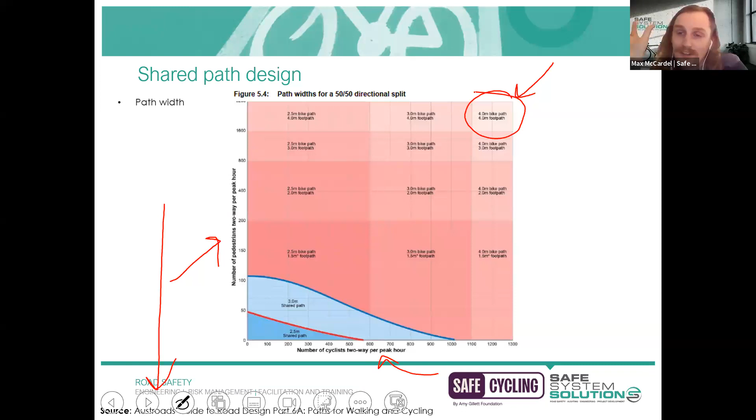So if I look right at the top corner, where I've got lots and lots of pedestrians and lots of cyclists, it's actually recommending we install a 4-meter wide bike path and a 4-meter wide footpath. It's not suggesting we just have one super wide shared path area. Instead, it's saying let's put riders in this space, make it 4 meters wide, and pedestrians over here, 4 meters wide, separating those two users. So an important clarification there - we don't always have to be trying to share our paths.

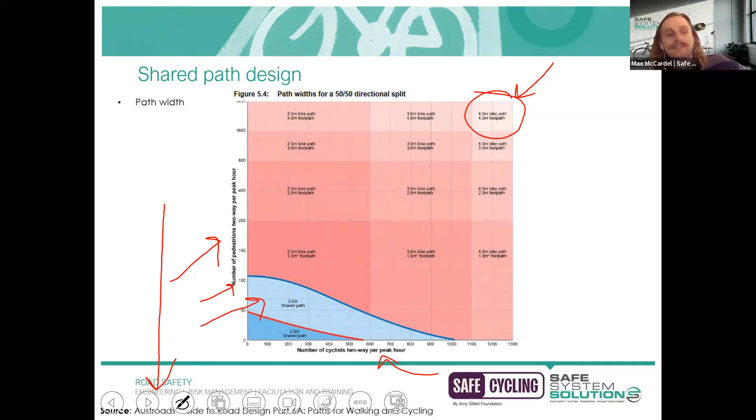You can see this blue area is where a 3-meter shared path is being recommended. As the pedestrian numbers get higher, above 100, that's when we're already looking at getting separation between the two. So this is very helpful if you're currently working out what your future network could look like. If you're into strategic planning, this is a wonderful figure to help guide that next stage of development.

Another very common reference, out of the same document, suggests typical widths for shared paths. The way they've categorized these paths is into 3 terms: a local access path, a regional path, or a recreational path. Unfortunately, there's very limited definitions to clearly demarcate what the difference between each of these is.

So I'll give you the practitioner's translation of this. There is information within the Austroads that supports this, but it's relatively vague. The local access path is what's shown in this left photo. You can think of it as a local street - it's not meant to have high volumes of pedestrian or cyclist traffic. Instead, it just provides very small, probably residential access to that specific part of the network, so you wouldn't expect a throughput of traffic there.

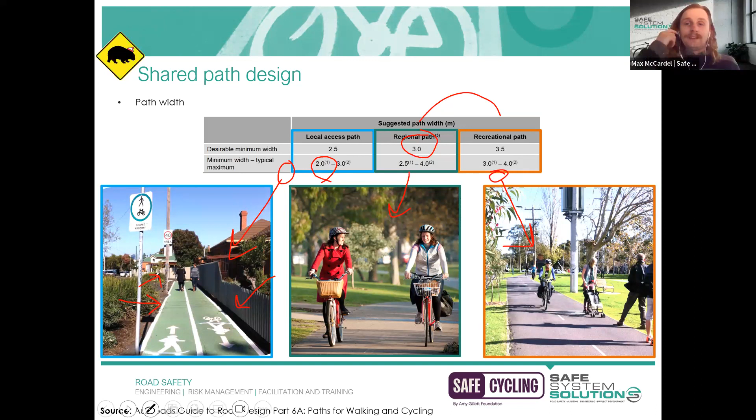Alright, so we'll get stuck into our gradients now. Generally, when we are thinking of gradients for shared path design, we're pretty concerned about the uphill gradient, because we know that generally most riders don't like cycling up hills.

I'm one of those riders. I actively check my route prior to getting on the bike to make sure that there's nothing too hilly because I'm just not built for that. And so I will actually go out of my way to ride a flatter route.

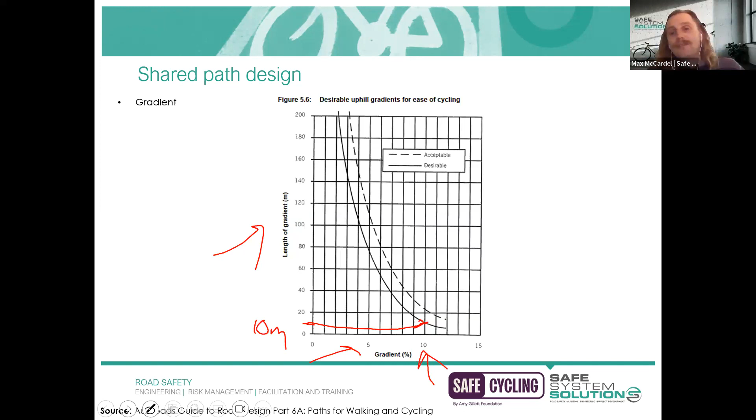So yeah, that's just what this graph is trying to tell you. But I think it's also important to reflect on the other aspect, whereby generally shared paths are bi-directional, so you can travel both ways. So if you've got a cyclist that's traveling uphill at 10%, then they will also be expected to travel downhill at that 10% as well.

And that leads in nicely to this next little figure that we've shown here. So we can see here, this is kind of like an overpass structure for the shared use path - they cross over this busy arterial road and don't have to deal with all that traffic over there, which is great. But they do have these ramps that bring them back down to that shared path level again.

I'll open up to the chat and pose a question - you just need to chuck your answer in the chat. What I'm interested in is, is there anything about this particular site that could be concerning if you were a rider traveling down this path here? I'll give you 30 seconds - just have a little look at this photo and think about if you were riding down this path, what could be an issue with this example?

All right, I can see lots of answers coming through, which is fantastic. Faster than I can read them, in fact.

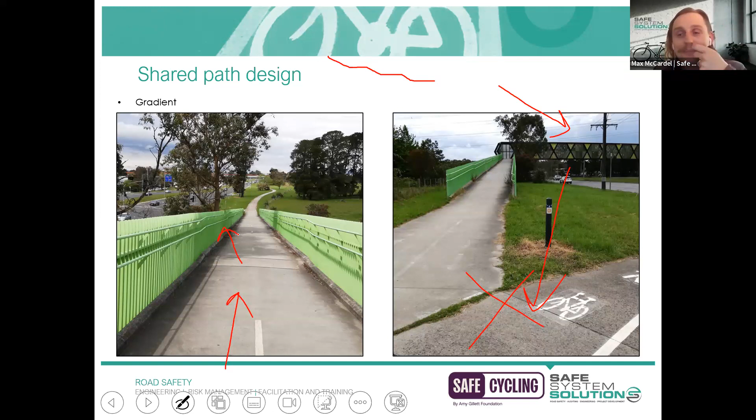Really good feedback and analysis from lots of people there. Marissa, I'll leave it to you to pick a couple of winners, but lots of good insights there.

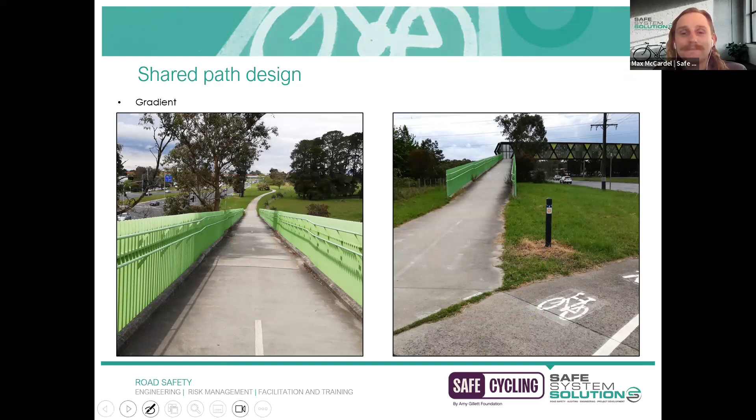For those who have done any geometric design, you'd be familiar with the idea of an operating width or envelope. We have envelopes for passenger vehicles and heavy vehicles that articulate the dimension requirements and clearances for that specific user. Our bicycle riders have a similar operating width, and the way that's defined is we take a nice, easy 1 meter. Of course there are lots of different bicycle arrangements, some taller, some shorter, some with much wider handlebars, so this is generally taken as the average. As time goes on and the fleet changes, I'm sure we'll see changes to these dimensions too, but this is generally what we work with: a 1 meter operating width.

The head clearance as a minimum that we like to provide is 200 millimeters above where the rider is seated. Where that becomes most relevant is if you've got shared paths that cross underneath roads, or use existing culverts to get through specific areas and things like that. That's when that head clearance would be most useful.

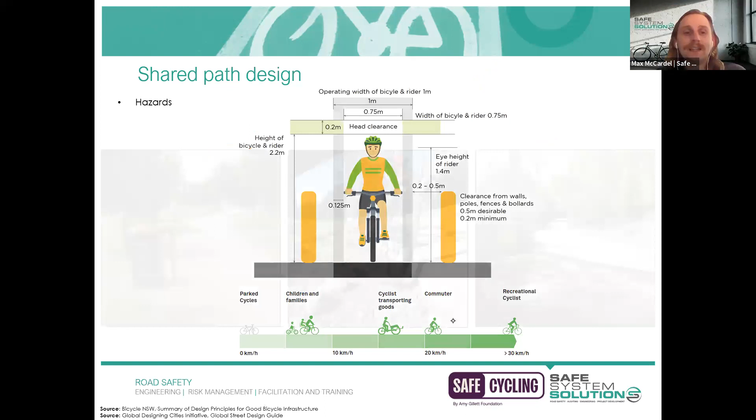I touched on briefly hazards and what kind of distance from the operating width would be considered a hazard. More commonly, the approach is: look at the edge of a shared path and measure half a meter back - that's 0.5. Anything that is fixed within that space will generally be considered a hazard. That's the more practical way of interpreting the figures I showed previously. So take the edge of your shared path, and if you're doing any CAD work, just do a half meter offset line and pick up any features within that space. If they're fixed, they could be considered a hazard for the cycling community.

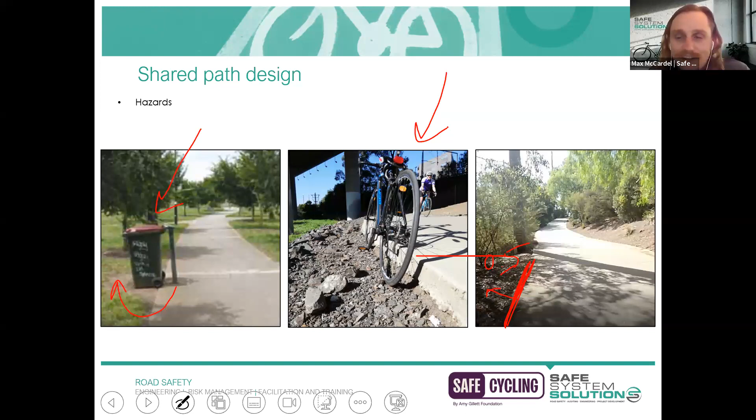Another really common one shown in the middle here is the lack of batter - you can see the full depth of that concrete is clearly exposed. I'm guessing when the contractor went out there, that's where their form was, and they took off their form and didn't backfill anything. That 120 mil drop off is significant enough that if you were to become an errant rider within that space, it's very unlikely you'd be able to make your way back onto the path. Instead, you're probably going to fall off and potentially end up in the drink over there. So this is just a simple one where you ensure your contractors are aware they need to backfill up to the top surface level of your path.

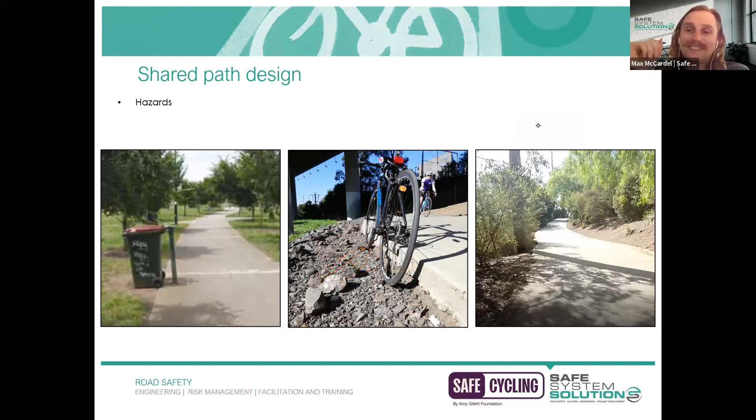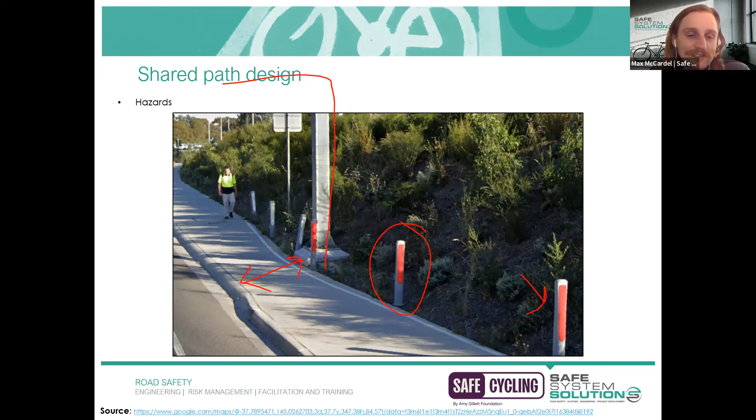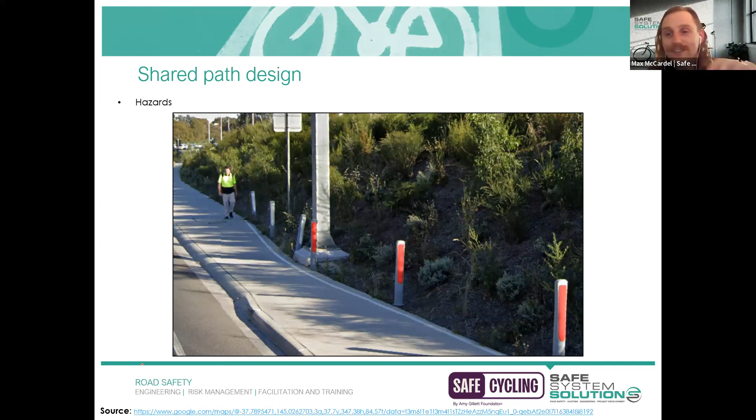Of course, if you're reviewing things like this at the design stage, or designing these things yourself, you wouldn't go straight to this. You would instead say, okay, I know I'm not getting my half-meter offset there - let's instead shift this across, use the embankment, maybe build some retaining wall just to make sure it's structurally sound. Then you've got a nice, consistent width for your shared path all the way through there.

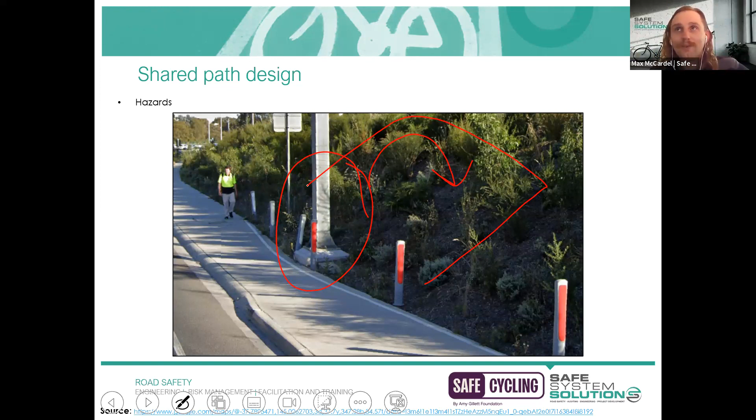It follows a very similar calculation, so nothing too daunting, just different coefficients being used. Things you'll need to make assumptions of are the speed of the cycling community, the friction coefficient you're going to use (generally worst case scenario, which is wet conditions), as well as the grade of the path.

Your sightline requirements are important for both your horizontal geometry, so looking around curves, and also vertical geometry, so looking over a crest and things like that.

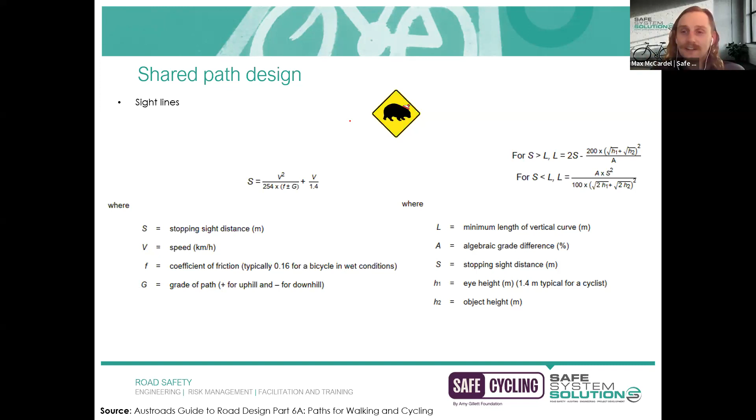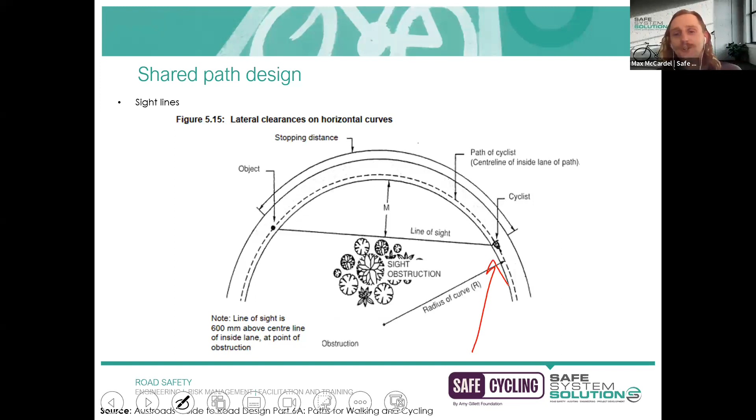Just to paint a picture here, this is an example of horizontal geometry, whereby we've got this cyclist turning around the bend, and if there were to be some form of hazard on that path, it's important that they have adequate time to stop so they don't collide with that hazard. Same principles and philosophy as road design sightline checks, just applied to our shared path network.

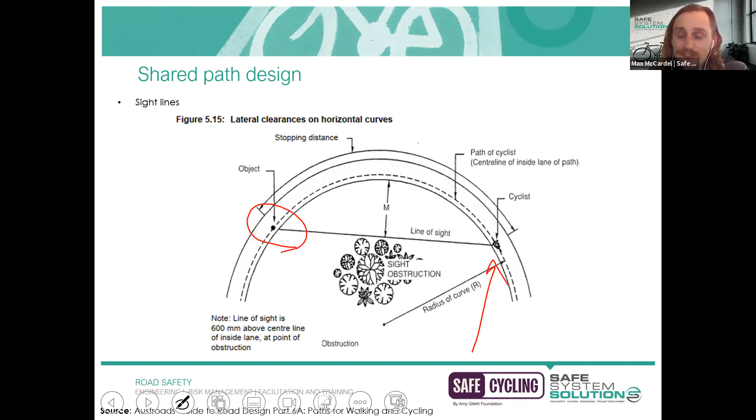Now, in practice, this is generally what you could be doing. This photo is actually of a shared path - it may not look like it, but this is completely unsealed. If you were riding along here, you can appreciate that because of the overgrown vegetation, you can't really see what's happening beyond that bend.

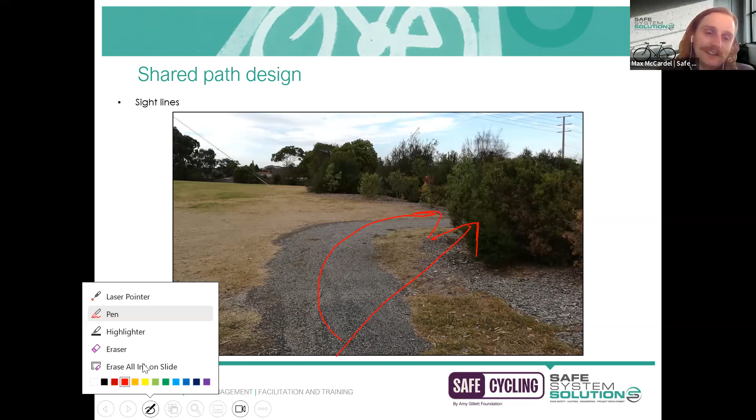If there were a fallen over log, or a cyclist on the ground there, and you're just traveling along, you may have no idea that's there. That's where those sightline requirements come into play. All you'd need to be doing, if you're in that design space, is checking what type of landscaping is going in, how big it gets, and even considering vegetation trimming just to help open up the sight lines.

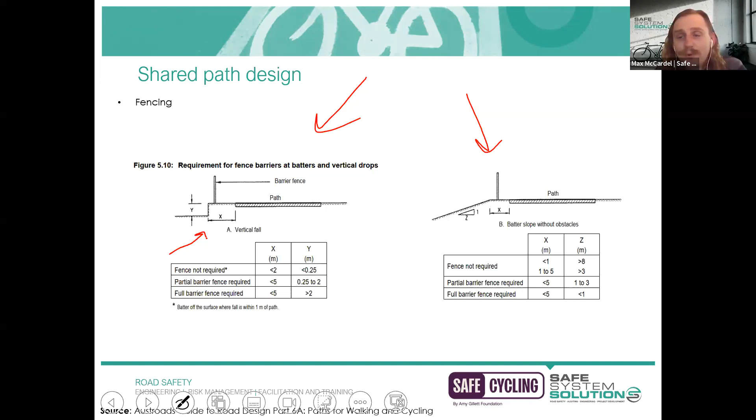For those not too familiar with these tables, don't be too stressed—I'll chat you through it, but you can leave the technical details for those comfortable with it. Basically, we've got X, which is our distance from the edge of the path to wherever the hinge point or vertical drop is, and Y, which is the height of that drop.

Our first category: a fence is not required where X is less than 2 and Y is less than 250 mil. The reason a fence isn't required is because we should actually be battering off the surface—filling in this gap and flattening it out. Don't worry about a fence, just use natural fill. That's what that first category is saying.

The next two categories are referred to as a partial barrier fence or a full barrier fence, and I've got photos to show the difference between the two. Basically, if it's less than 5 meters away and Y is between 250 mil and 2 meters—a 2 meter drop is huge—then you'd put in a partial barrier fence, but if it's greater than that 2 meters, you'd put in a full barrier fence.

Similar approach with the gradients or the batter adjacent to the shared path. You've got this calculation, 1 to Z—for those who've done cross-section longitudinal analysis, that's common terminology, or rise over run for those who remember year 8 mathematics. That's the slope of the grade: 1 over Z, and the bigger Z is, the flatter it is. So if it's super flat, we don't need a fence at all, but the steeper it gets, we'll go for either a partial or a full fence—I'll show you those differences now.

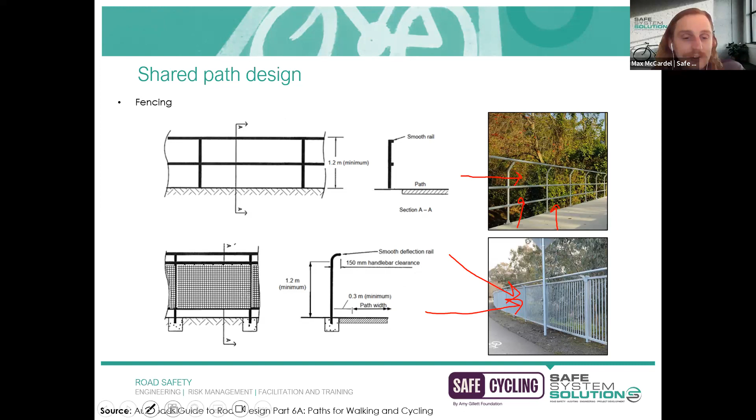In my personal opinion, it's overly complicated. I don't know why they went with these separate categories here. I've seen much more of these full barrier fences being installed, perhaps where there isn't the need for it, but it might just be easier to do, or maybe manufacturers find it easier to install. I'm not really sure. Anywho, that's just my 2 cents on the fencing types.

But what is common in both of them is they have this smooth rail or smooth deflection rail. You can see the way that has been designed, it actually juts out, sits proud, and extends into the shared path itself. The way it's designed is if you've got a rider on their bicycle, the height of that smooth deflection rail is between their elbow and shoulder. So if a rider was to become errant or start to drift off, the first thing they collide with is this smooth rail, not any of the vertical members that could snag or any of those little brackets that come out - none of that would be hitting the cyclist. The first thing that strikes is that upper arm area.

So that's also referred to as cycle-friendly fencing. It's just this idea that you have a single rail that juts out and protrudes so that errant cyclists are basically colliding with a smooth rail as opposed to any protruding bits of metal.

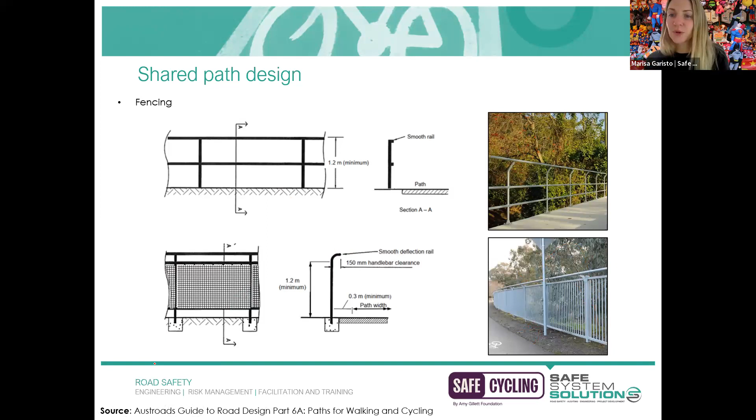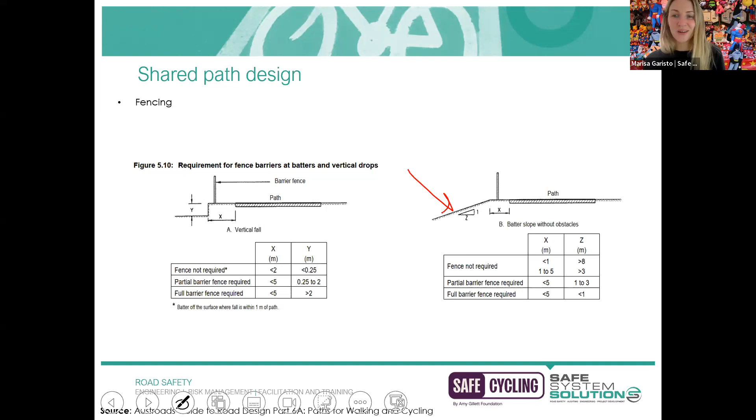So a couple of questions. Does the height of the batter, or what is at the bottom, come into play when deciding on a fence or not? For example - we've just got an example, can 0.5 meters offset to a 1 to 3 batter 2 meters high onto a flat grass area. Okay, so I'm guessing the way I'm reviewing that is like you might have a batter there and then another drop off. So you could still use this calculation because this is saying anything that's less than 5 meters would be considered a hazard, depending on how big that drop off is. So you may just be combining both of these to determine if a fence is required.

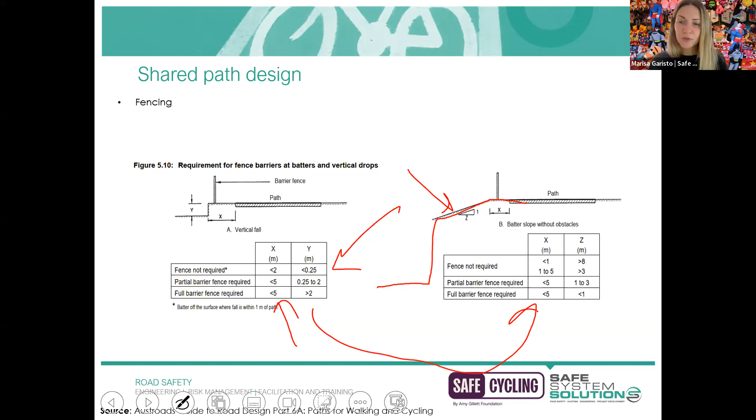Okay, and does the horizontal deflection rail pose a spearing risk to vehicles? Great question, let's give a prize out there. Yes, I would say - theoretically they're generally just one long welded piece of steel, so it's not as if... well, I guess there are joints, so theoretically it could come off at that joint and act as a spearing risk. So you generally wouldn't be installing these adjacent the carriageway where they are operating in that longitudinal fashion, because you could have an errant vehicle drive into that and then the horizontal deflection rail just going straight through the windscreen. So very, very good pickup.

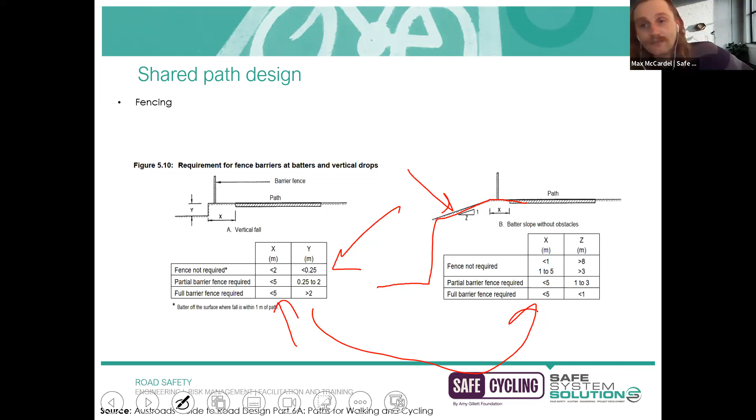Great, thanks, Max. No other questions, but poor Matt had his daughter fall through a partial barrier fence into the creek. Oh, I think she was okay. Oh goodness. There you go. That's good, yeah.

We've just had - can you run a couple more questions? We've just got them coming in on the chat. What would be an alternative fence type to implement?

So if you were working along the carriageway, generally what you would do is you would install an approved barrier system. That edge barrier system would shield errant motorists from the shared path traffic.

There's a few options you can do. You could have on the posts itself, which would be installed within the shared path, little protector caps. So if a cyclist were to clip them and fall onto those posts, they're not just falling onto metal, an I-beam, something like that. They've got a little bit of padding to them, still going to hurt.

But you could also do a back-to-back W-beam profile, whereby on the carriageway side you'd have the barrier system with the W-beam, but also on the shared path you'd similarly have the W-beam, not because you're expecting cyclists to crash through there with such force, but purely to protect them from those posts that can create snagging risks. So generally, adjacent carriageways, you don't see these smooth deflection rails, you see those barrier systems implemented instead.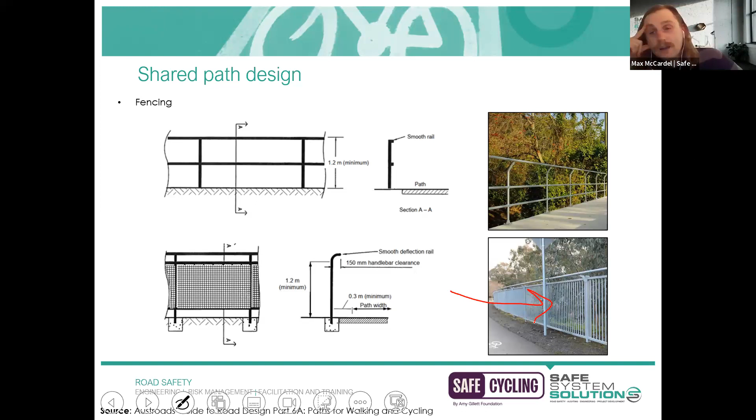All right, shared path crossing roads. Now I've got a little poll here, I believe. And I'll let Marisa launch the poll.

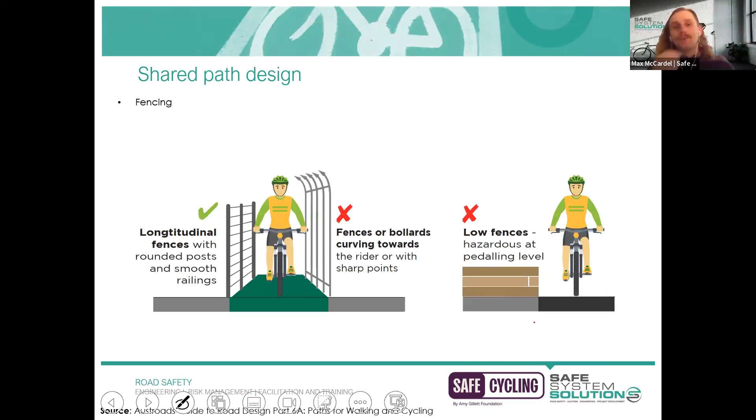It's very conveniently about fencing. We've had a good discussion around fencing today. So the question I've got is, hopefully you've seen this launch on your screen: should fencing be installed along this shared path, the one that I'm showing here? Just to give you a little demonstration, what I'm talking about is, would you put fence here?

That's a pretty good drawing. I'll give you 20 seconds to have a go at that. 18 seconds. Love the wayfinding, yeah, pretty jazzy, isn't it?

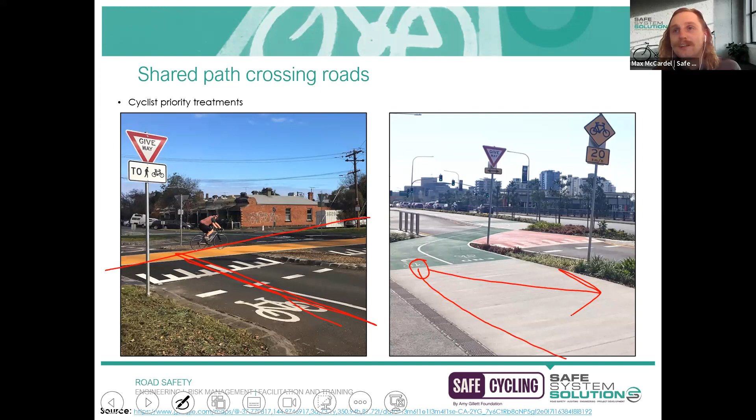I'm really not trying to throw any diss to Brisbane - this is a wonderful path here, the Brisbane Bicentennial Bikeway, and I do appreciate that this project has pretty significant constraints. I just wanted to show that as an example of why we would be looking at trying to make things as perpendicular as possible.

And just to show you what this site actually looks like out on the ground, you can see there's actually quite a lot of these bicycle tread marks, perhaps indicating that riders are kind of slamming on the brakes at the last minute because they are seeing that this vehicle is not yielding to them and they are forced to undertake emergency braking. So yeah, just kind of illustrate that as an example.

All right, bollards. Now we do see these incredibly commonly across our shared path network, basically installed wherever there is a carriageway. And whilst historically that has been the approach - wherever the shared path interacts with the carriageway, install the bollard - I think we need to move away from that philosophy a little bit, because we need to acknowledge that these things are hazards. We talked about before that anything half a meter away from the edge of the shared path is considered a hazard. Well, these things are placed right in the middle of shared paths, so they are definitely considered a fixed hazard for cyclists.

Now, really common ones are just using these types of vertical bollard shapes. You may have reflector tapes or things like that on it. The reason that you may have this middle one included as well, because surely the two on the outside would be enough to stop vehicle entry, is to stop kind of monkey bikes or any of those dirt bikes entering. To me, that is perhaps one better achieved with enforcement, because this is a 24/7 hazard for all shared path users or cyclists within that area, whereas the risk of monkey bike users could be once a month at specific times, and you've got to weigh up what's a more significant risk.

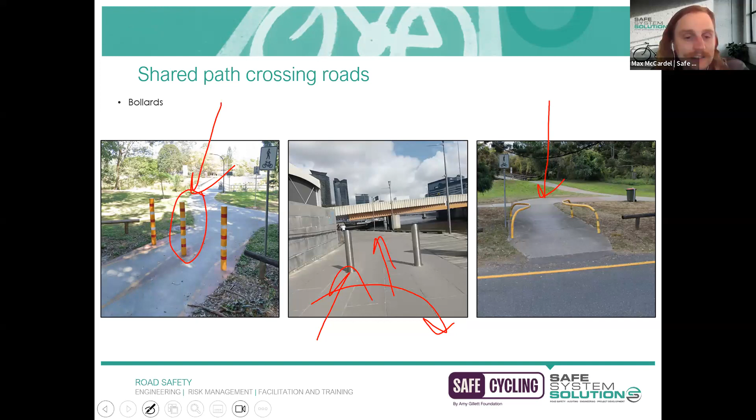More bollards, I've got lots of bollards - sorry guys, stay with me. Timber bollards, this one is like a chicane treatment. Generally I think they can work quite well. They certainly slow down cyclists as they're approaching a conflict point. However, what I have seen is them become very narrow.

If you were a cyclist riding, say, a cargo bike, or you had a bike with a trailer, you might run into trouble getting through there and navigating this. This one isn't too bad, it's relatively wide, but there are really, really narrow ones where it's physically impossible to take specific bicycles through those features because the swept path just does not allow for that. So they've got their pros and cons as well.

This one is just an example of a U-shaped bollard, heading into Hobart there. I always use the analogy of imagine if we had a traffic lane approaching a rail line and we just put a bollard in the middle of the traffic lane and said, you've got to slow down here, just be really careful because there's a big hazard coming up ahead. There's no way that's how we would treat that.

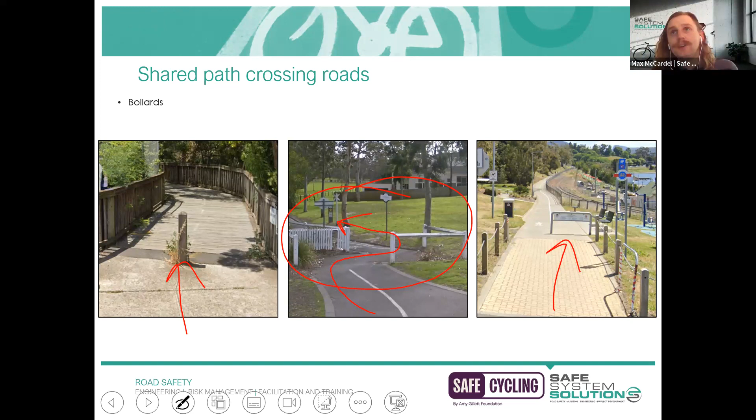So we've got this idea that we have to put bollards everywhere. I think we need to take a deep breath and think about our risk profile. What's more common to occur - is a vehicle going to enter this space, or is it more common that frequent injuries will occur for our cycling community? Now, to give you an appreciation, I've included this as an example.

This is Andrew here, and a few years ago he ran into this bollard. This is just right down from our office on the Upfield bike path. You can see by looking at that bollard that it's been struck many, many times. When Andrew collided with it, he fell off his bicycle, broke bits of his face and his wrists and things like that, and called the ambulance. As he was waiting for the ambulance to arrive, he saw 3 other crashes occur within that 40-minute period of cyclists riding into that bollard.

We have a record of one of those crashes. So you can go into the police reports and you've got a hospital record of a cyclist that's crashed into the bollard, but those other 3 that occurred that day, we don't know about. So we know that cyclist crashes are very, very well underreported, and the cycling community doesn't necessarily know that they're able to report things like this.

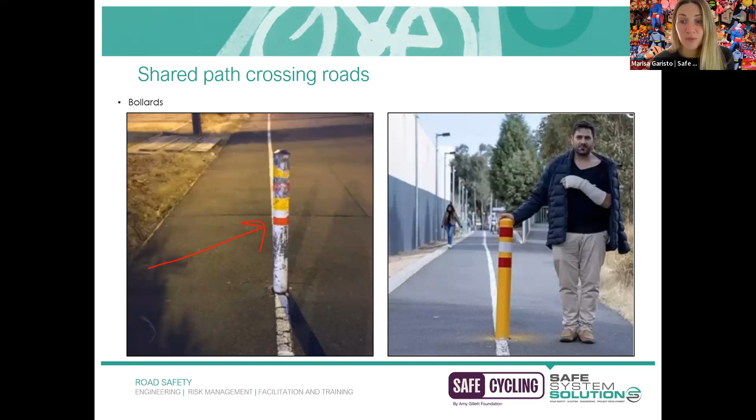Thanks Max, there's lots of chat about bollards. We've just got one question: what would you recommend instead of bollards? So if you need to prevent vehicles from illegally accessing an area, but need to allow for occasional maintenance vehicle access?

I love that, I've got a slide just for that. So let's give a prize out there for reading my mind. Great, thanks - this is a really, really more promising solution for this space.

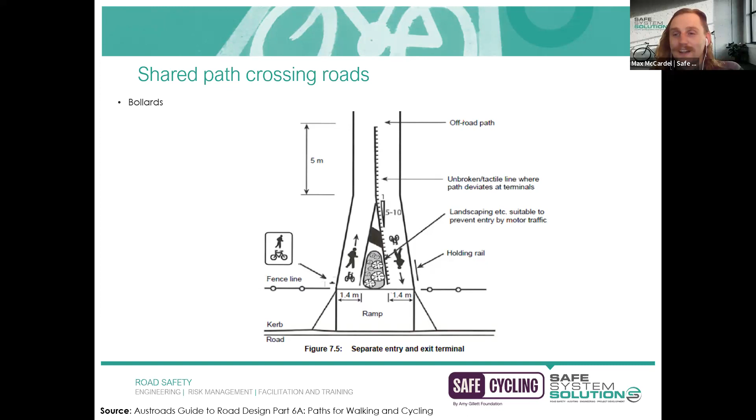The way that I view it is, imagine if you're a traffic engineer or you're in the road design space, you've got a local street that's approaching a major thoroughfare and you want to raise the awareness of that intersection. The humble splitter island has been used for decades, and I think that's also what could be installed where our shared paths are interacting with the road network.

The way it could actually be implemented is you could use landscaping to act as that splitter island. You could even put a bollard in the middle of that splitter island if you've got adequate space either side to help the delineation. But this much more clearly demarcates that there's a change occurring, there's access to the carriageway coming up, there's a conflict point, and it will also help to significantly deter vehicle entry at those locations. So I'm much bigger fan of this. This is from the Austroads design - if you want to take this and adopt it as your own, by all means.

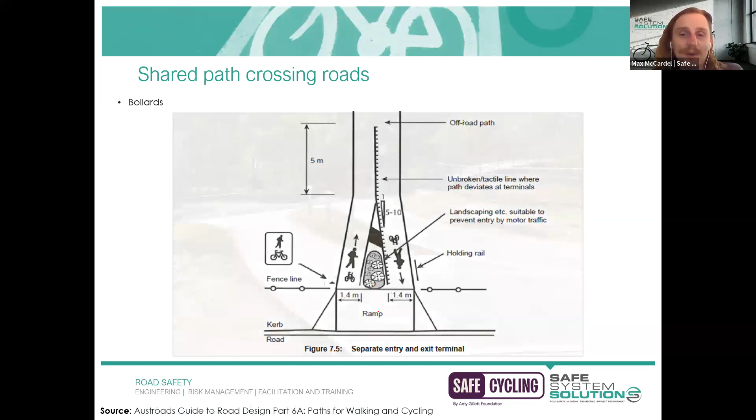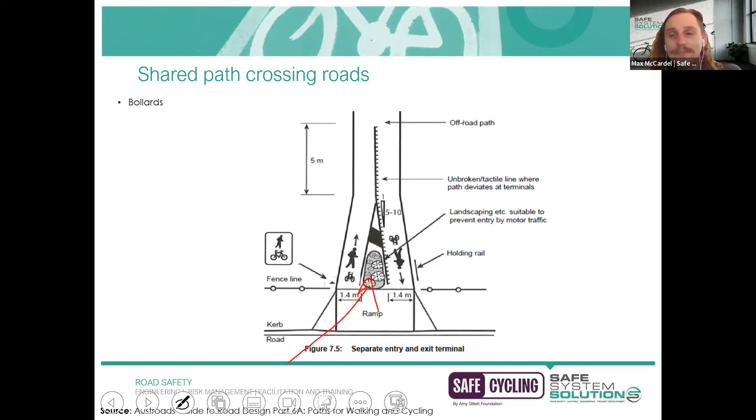One example that I could find, and I really would love another example. So if you've seen anything that looks vaguely like that, not just a bollard, please let me know, because I'm really on the hunt for better examples. This is an example of Gardiners Creek Trail out in the southeast here.

They've got this kind of grassed splitter island being used here. They are using bollards, but there's a reasonable offset that kind of demarcates the space. I actually really like these bollards because they've got solar panels on top, so they get all that delicious energy during the day, and then during low light conditions they're able to project illuminance onto the adjacent shared path, which is very handy.

So this is an indicative idea of what a shared path end treatment could look like, trying to utilize a bit more of that landscaping to help deter vehicle entry in combination with physical measures. You could also install low-lying bushes and things like that. If you've got any native vegetation you want planted, you could start to create a little community planter garden thing there. So anyway, that is more of ideally how we could be able to treat these things.

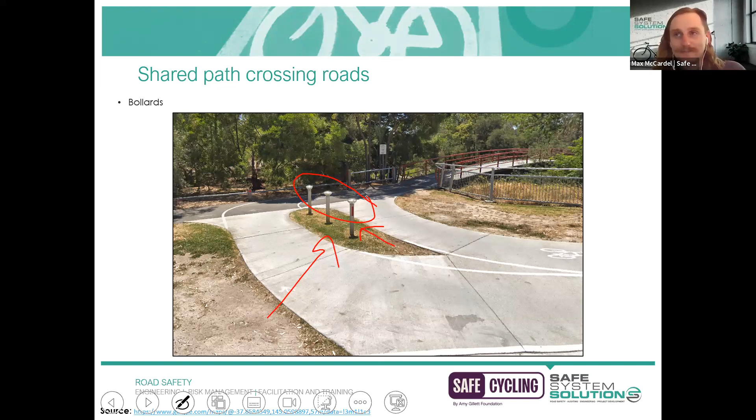Now, in saying all of that, and as I touched on with the ramp for the overpass, we still are required to adhere to our DDA requirements, our Disability Discrimination Act. Because these are shared paths, they're not exclusive cycling infrastructure, we do need to think about those who have disabilities and may interact within that space. So in particular, when we're thinking about shared paths crossing over roads, what is most important is the grades adjacent that section, the sight lines at the conflict points, as well as the use of tactile ground surface indicators.

You'll get some riders that say they're the worst thing ever and they're terrible, but I have not seen any research that would back up that statement. Anecdotally, I think you just ride over them and they're fine. Admittedly, some products are slipperier, but there's lots of manufacturers out there that are able to install friction TGSI panels there. So just wanted to make that clear, that we still are required to achieve our DDA requirements.

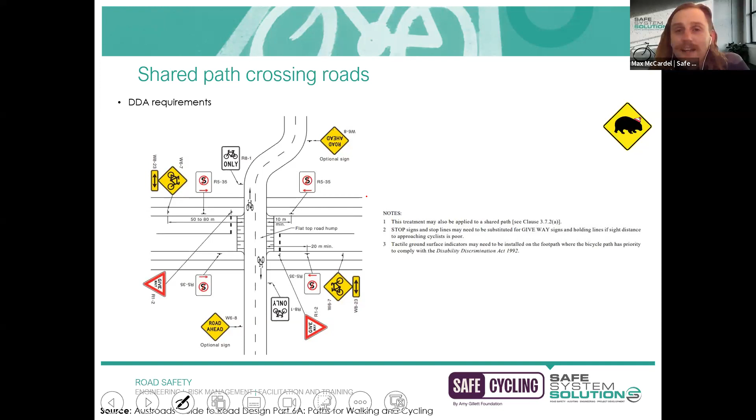You're on mute there, Marissa. Yeah, good old mute. While everyone's popping their answers in, we've just got a few questions on bollards, on alternatives, so I'll just shoot a few of them over to you.

So is there an alternative to bollards where there's a geometrical constraint so a splitter island can't be used? Or you need garbage access for bin cleaning? What can you do instead of bollards where there's no space?

Yeah, the splitter island would feasibly be able to install and still access any maintenance activities, because you could just drive over that splitter island, just either put a removable bollard in there or something that's flexible. But in terms of the more constrained space, it's always a difficult environment, and no, there isn't one easy solution that's going to fix that. Just trying to highlight the conflict point as much as possible, and I probably would have to look at that in a bit more detail.

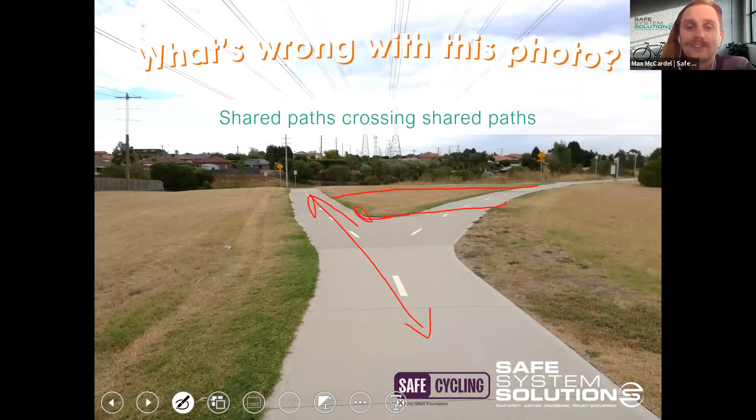As you've rightly pointed out, it's very unclear who would give way to who. What we would instead recommend in this space is to assign a priority leg - say this is the thoroughfare, and treat the other one as more of a local leg. We'd love to see this intersection squared up, get rid of all this grass, and put in a stop sign so it's very clear: this is the leg that has priority, and if you're coming off here, you have to yield to other path users, because you don't want to create that ambiguity. You want to make it very clear.

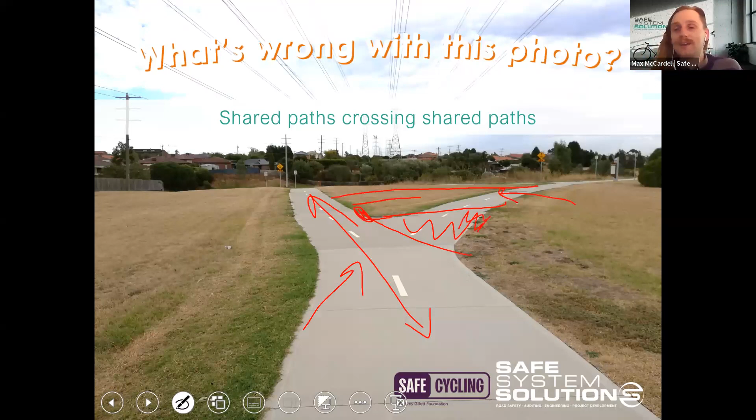Austroads has actually completed a research report on bicycle wayfinding, which speaks volumes about how important they consider the issue. When they've commissioned a research report and spent hundreds of thousands of dollars looking into a topic, it's generally pretty relevant.

It acknowledges that we're not very good at bicycle wayfinding here, and every jurisdiction has a different approach. This report has got some really good guidance - nothing groundbreaking, like you're not going to read it and think 'oh, of course I should put the bicycle symbol on there, include the distance, and where it's going to go.' It's not far out thinking, it's just, in my opinion, something that's been forgotten along the way. We always remember our street signs and directional signs for traffic, but cycling wayfinding is less of a priority, or just forgotten about.

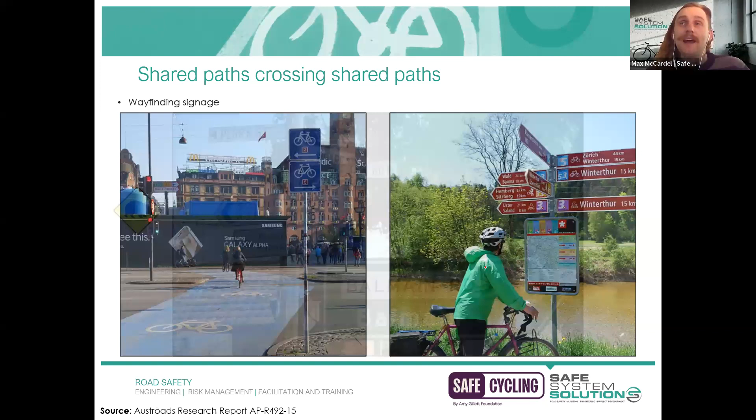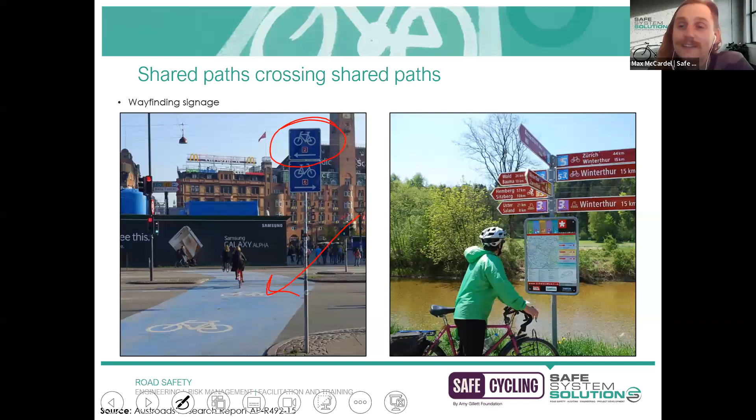In other jurisdictions, they are much better at this, and a really common way to demarcate routes is to use numbering systems. This image on the left-hand side is in Copenhagen - you can see bicycle route number 2, which will take you from the train station all the way to the town centre. So if you don't speak the language, you know you can just follow number 2 and you're going to get from A to B where you want to go.

A similar approach here in Switzerland, where they've also included distances. I've also seen the time it would take to actually ride there used instead - so rather than say 10 kilometers, just say 20 minutes or whatever. Anyway, just a few ideas there for you.

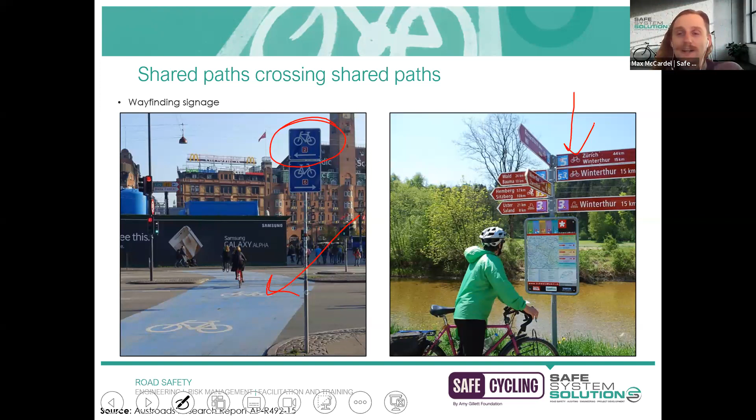Now, where we have conflict with shared paths and other shared paths, you may need to implement speed management treatments to ensure you're not having one thoroughfare just going at it, creating an uncomfortable scenario with high speeds at the conflict point.

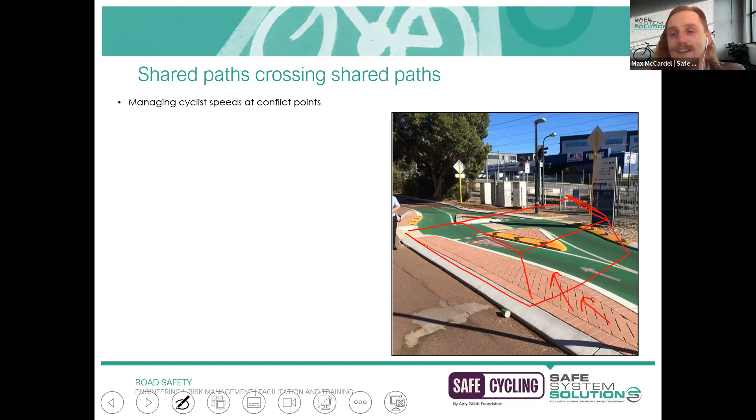Perhaps another solution within this space would have been to create a wombat crossing, for those familiar with that term. I'll try a 3D drawing, but it probably won't end too well. Basically, it's creating a raised crossing point for pedestrians, and as riders ride along here, they get this kind of ramp so they're forced to slow down. You wouldn't want to hit that at speed because it would feel uncomfortable. It wouldn't be as steep as I've shown, but that idea of using vertical deflection to physically slow down vehicle traffic, and award priority to pedestrians crossing, is another way you could treat these environments.